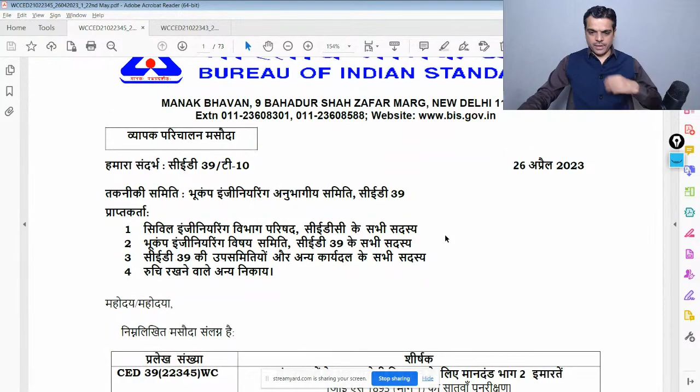Okay, so just let me share the screen now. Okay, so I hope you are able to see the screen now. This is IS 1893 part 2.

Okay, so I'll again highlight this point as we discussed, that we must examine this draft, and we need to state any difficulties which we may encounter or experience in our business or profession if this is finally adopted as national standard. So we must send our comments related to practical difficulties to BIS so that they can make appropriate changes in the document.

Okay, this is the format which we discussed. So you can refer the first part. Foreword is almost similar, wherein it is said that the different standards are being formulated, and here in this portion it says what are the changes made. So firstly, in this document, provisions are now added for the masonry building as well as for the steel building.

And here it quickly summarizes the major changes which are proposed in this document. The response reduction factor has been modified, and now it is renamed in the entire document as elastic force reduction factors, as we discussed in the part 1 also.

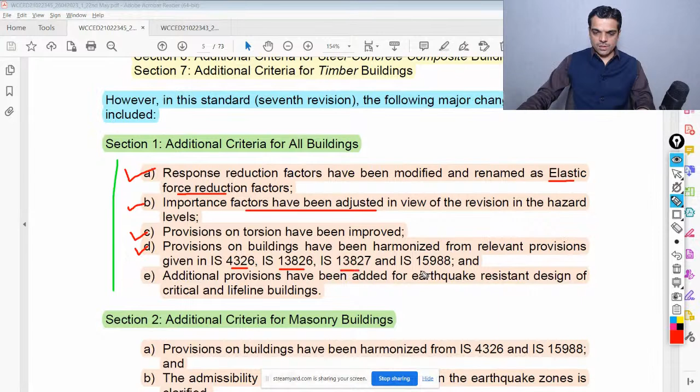Then provisions on the torsion have been improved. So we'll see what additional provisions are added now for the torsion. And then provisions on buildings have been harmonized from relevant provisions given in 4326, 13826, 13827, and 15988.

Section 2, additional criteria for masonry buildings, is now added in this document. So provisions on buildings have been harmonized from 4326 and IS 15988. The admissibility of different structural systems in the earthquake zone is clarified.

Now these are again two major revisions for concrete buildings. First of all, the admissibility, or let's say which structural system we can provide in a different earthquake zone, that is clarified, or we can say it is mentioned in the table.

And the structural plan density of the structural walls is now varied with the earthquake zone. So in the present standard, the structural plan density is constant, but now in the draft standard, it is proposed that it will vary with reference to the earthquake zone.

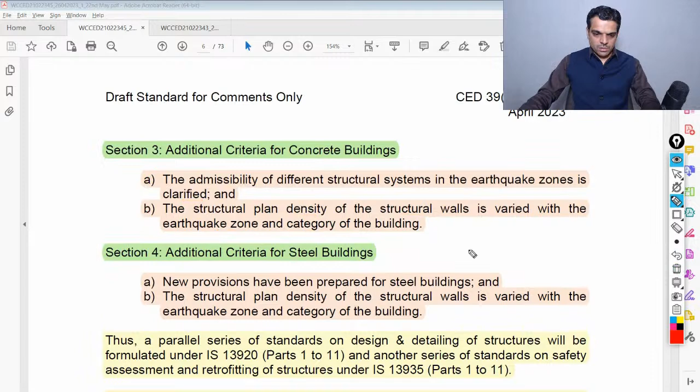And for steel structures also now criteria are added. So new provisions have been prepared for steel buildings. I think this point number B looks like a copy paste because structural plan density is not applicable for steel structures.

And these are the various standards which are referred while preparing this draft document. Okay, so the foreword is always a very important part wherein we get a quick view of the document without getting into the final clauses.

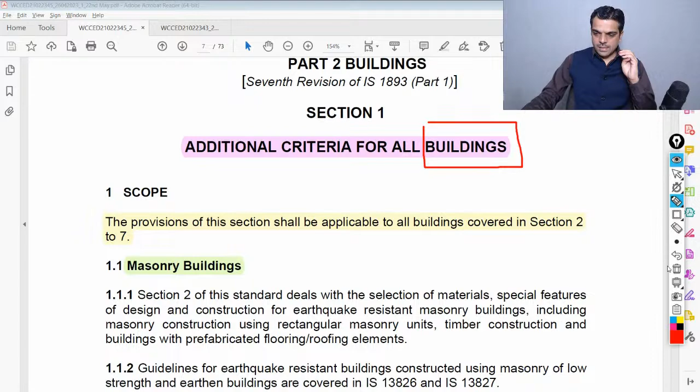So as we all know, part 2 is for building kind of structures, and this draft document is talking about masonry buildings, concrete buildings, and steel buildings. Terminologies are added now. So I have highlighted a few important terminologies which we'll see.

So for the base, now it is defined that for buildings with basement, it is considered at the bottommost basement level. And for buildings resting on pile foundation, it is considered to be at top of the pile cap. For the raft foundation, it is considered to be at top of the raft, and for footing, it is considered to be top of the footing.

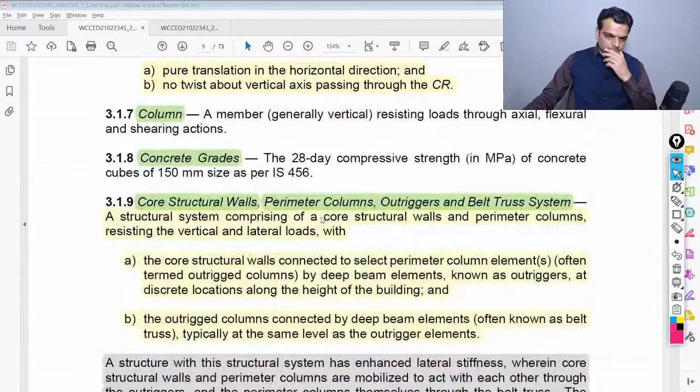There are definitions which were there in the earlier document also. The definition is added for core structural walls, perimeter columns, outriggers, and belt truss systems.

Okay, I think this is one of the provisions. So I have highlighted the important points based on my quick view of this document. Still, I'm referring this document. So if you find additional points, please populate them in the chat box. If time permits, we'll discuss it today, or we are planning a couple more sessions. In those sessions, we will again be discussing all the finer points which we might have missed out.

So for height of the building, this was a common question which we were receiving, what should be the height of the building wherein the basement is provided in the building. So what it says here, the height of the building from its base to the top of roof level, that's okay. Now in this para it says excluding the height of basement stories, if basement walls are connected with the ground floor slab, or basement walls are fitted between the building columns.

So what it says, if the basement walls are connected with the ground floor slab, that is the first condition, or basement walls are fitted between the building columns, in that case the height of the building needs to be considered excluding the height of basement stories. Okay. And in the second case, we need to consider the height of the basement stories when basement walls are not connected with the ground floor slab and basement walls are not fitted between the building columns.

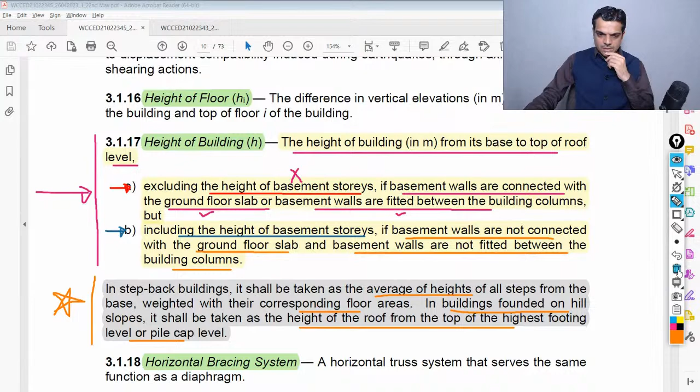So there were a number of questions which we received earlier for the step back kind of building. If this approach is used, we received feedback that the time period derived with this averaging of height is not appropriate. Of course, this is feedback which we received from a few practicing engineers, so I'm just highlighting it. Okay, these are different systems.

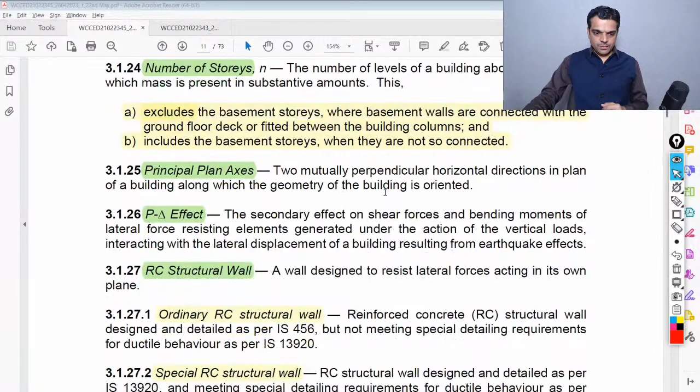Now in the number of stories also, the same thing is mentioned: it excludes the basement stories where basement walls are connected with the ground floor deck or fitted between the building columns, and it includes the basement stories when they are not so connected. The height of the building will have a major impact in calculation of the time period of the building, right? And that will impact the seismic demand of the building. That's why height of the building is a very important parameter.

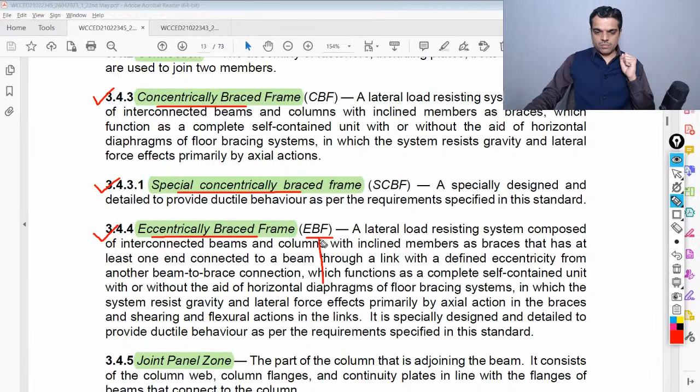Then terminologies are added for masonry buildings, because now there are new provisions for masonry buildings added in this document. Concrete buildings, steel buildings. For steel buildings, definitions are now added for CBF, SCBF, EBF. CBF is concentrically braced frame, SCBF special concentrically braced frame, and EBF eccentrically braced frame. We'll see this towards the last part of the document. Now, in the higher seismic zone, it is said that only EBF should be provided. We will discuss that point when we reach that part of the document.

Okay, so let's go down now. These all are symbols. It says that the four main desirable attributes of earthquake-resistant buildings are robust structural configuration, at least a minimum initial elastic lateral stiffness, at least a minimum overall lateral strength, and adequate ductility.

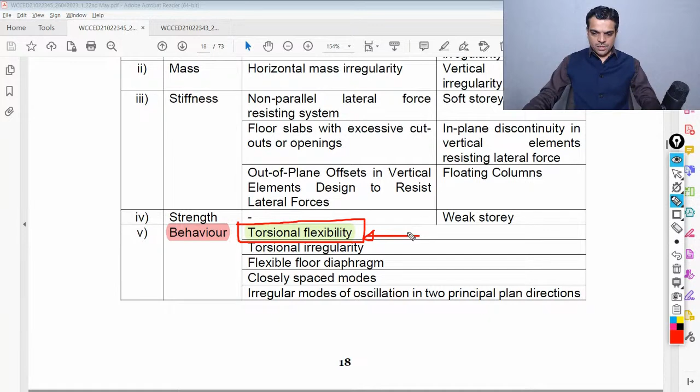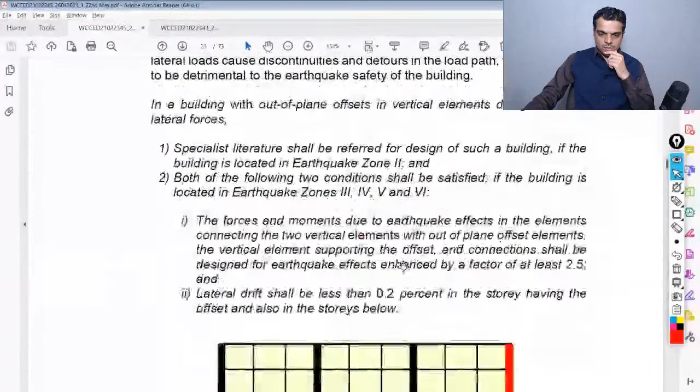Okay. Now, as far as irregularities are concerned, if you look at this table, I think this is one more change: torsional flexibility is one of the additions. Of course, torsional flexibility is defined from two criteria, which we'll see in the subsequent part of the document. As I could see, all other irregularities are the same as they were earlier. So re-entrant corners and plan irregularities, non-orthogonal panels. What I have observed is that the wording is almost the same. If you have noticed any differences in language for any type of irregularity, please mention it in the chat box.

Okay, so this is the torsional flexibility here. Now, a building is said to be torsionally flexible, or flexible from the torsional perspective, and this statement is already there in the present code, when the natural period corresponding to the fundamental torsional mode of oscillation is more than those of the first two translational modes of oscillation along each principal plan direction. So this statement is already there, right? And it is said that buildings with torsional flexibility shall not be permitted. Okay. So it is not permitted, right?

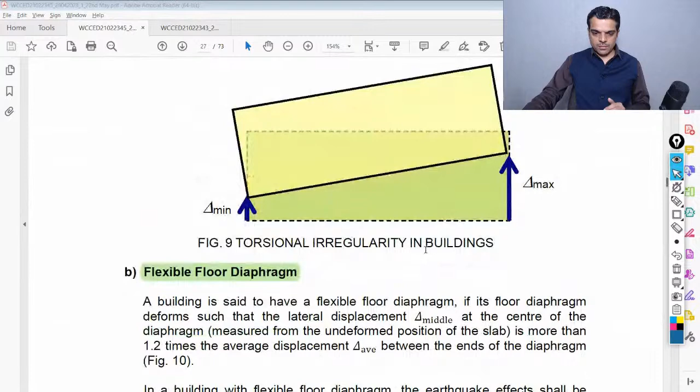And then it gives the definition of torsional irregularity. But torsional flexibility is again defined in the subsequent pages of the document. This is a flexible floor diaphragm, then irregular modes of oscillations.

So in the stiffness requirement, the stiffness modifiers are defined for three different types of structures: masonry building, concrete building, and steel building. For steel buildings, as we know there is no possibility of any crack formation, and that's why all factors are one. So no property modifier or stiffness modifier is required for steel buildings.

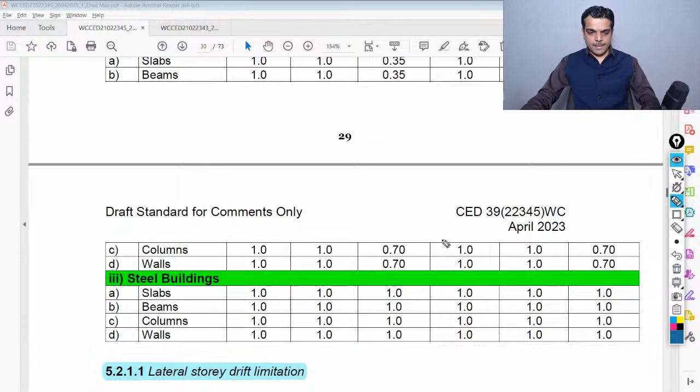For masonry buildings, let's skip discussion at this point and focus only on concrete buildings. In the concrete buildings, if we observe the value, then the value of stiffness modifier is same for the serviceability condition as well as for the ultimate condition. This is not correct in my opinion. The value shall be different. Even if you refer IS 16700, these values are different for serviceability as well as for the ultimate condition. So this is one change which needs to be made in this document.

The lateral story drift in the buildings is now defined with reference to the zone of the building. In the present standard, it has a fixed value. But now the value varies with reference to the zone. So we can see as zone increases, the permissible lateral story drift decreases. For example, for zone number 6, the value is restricted to 0.0020, which may be quite stringent. We have not put any numbers, but I think this drift could be stringent because on one side, earthquake forces have also increased, as we were discussing in the earlier session. Similarly, on the other side, the permissible drift value is also restricted in the higher seismic zone. And for zone 2, the permissible drift is 0.0040.

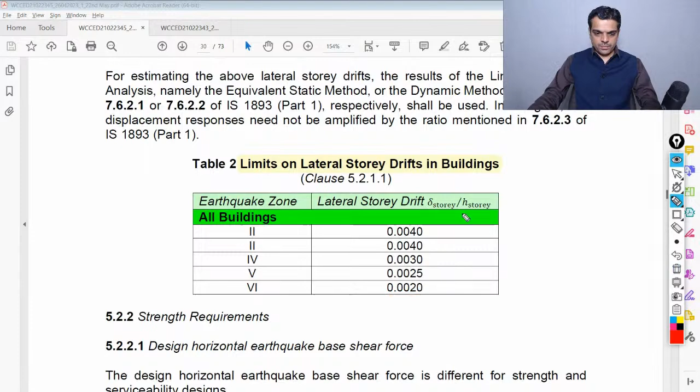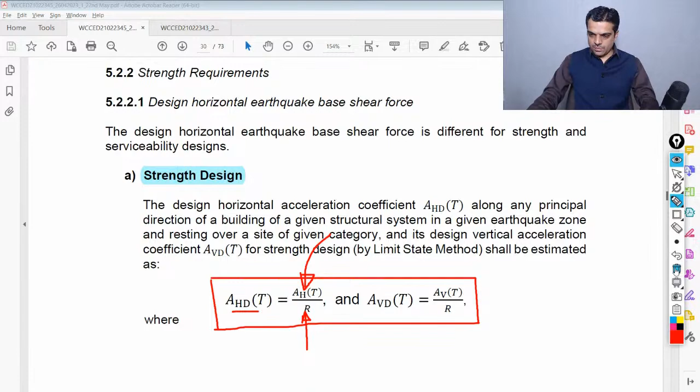So, for strength design, the horizontal seismic force will be derived using this formula. We will derive the value of A_H from part 1 of this IS 1893 document, and the R value will be defined from this draft standard. Once A_H is divided by R, we will get the seismic demand, or let's say a design base shear, or a seismic coefficient, we can say.

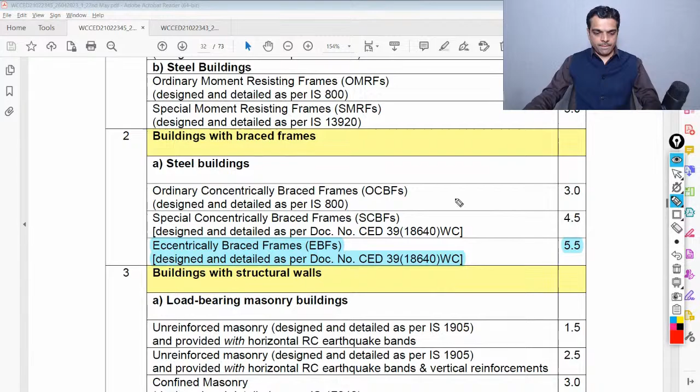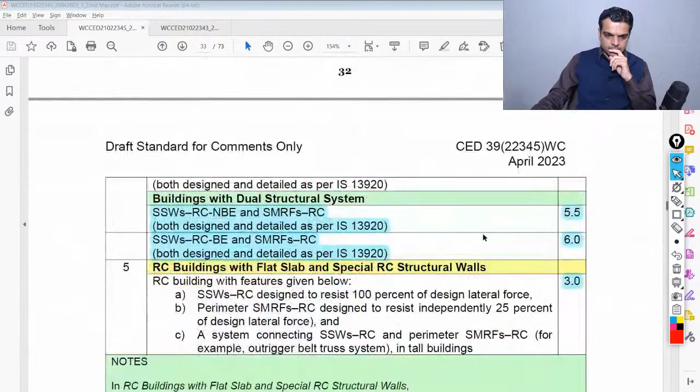And then for buildings with dual structural system: SSWs means special RC structural wall, NBE means boundary elements are not provided, and SMRF. So if it's a combination of special moment resisting frame and specially designed structural wall which doesn't have boundary elements, in that case the factor is 5.5. And if everything is same and you provide the boundary element, in that case the factor will become 6.0. And for the flat slab structures, the factor is mentioned as 3.0.

So these are a few changes which I could notice in the new terminology, which is elastic force reduction factor.

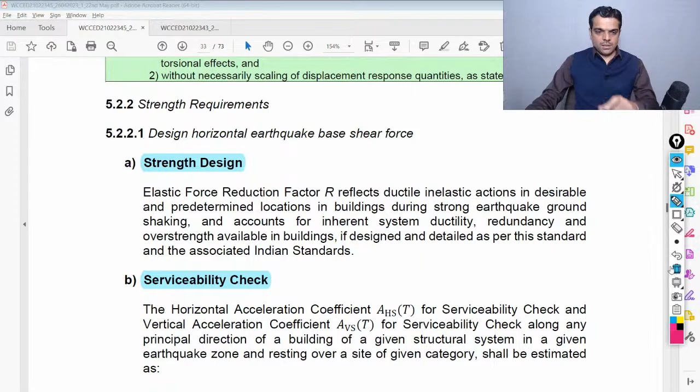So as we were discussing in part one, the seismic demand will be different for strength design and serviceability check based on the time period. So we need to calculate the earthquake forces separately for both the cases.

Seismic weight of floors is defined, like how much reduction we can do in the live load. Okay, let's skip this part.

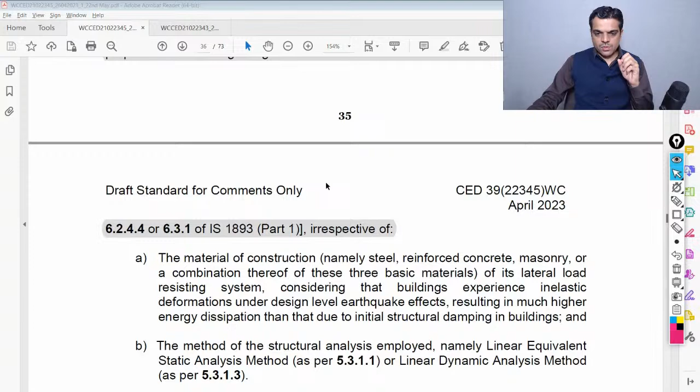Importance factor, as we discussed, these importance factors are actually calibrated to match the value of seismic demand. Of course, the seismic demand from these draft standards is significantly higher compared to the present standard. But if we compare the importance factor value, we could see that the importance factors are not increased. It's only the zone factors which are increased significantly.

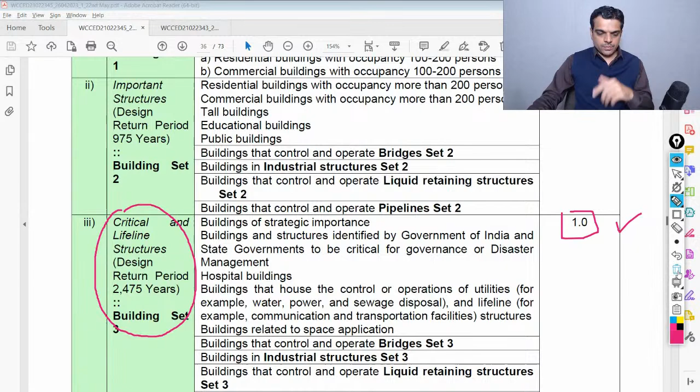For example, let's see the critical lifeline structures - for that also importance factor is 1 only. Whether it's an important structure or a normal structure, the importance factor is only 1. So that means the effect of importance factor is already included in the earthquake zone factors introduced in part 1 of the document. Yeah, and even for special structures, we can see the factor is only 1.

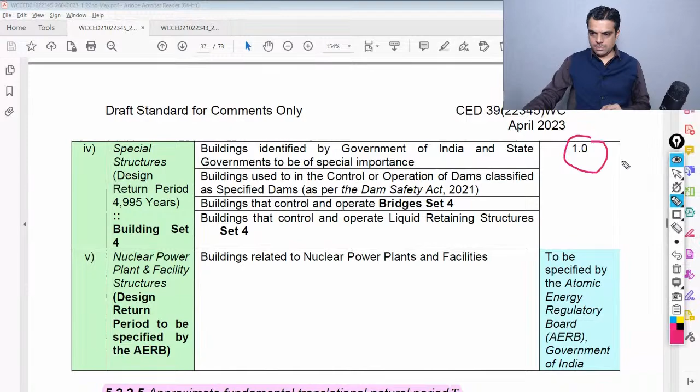Then approximate fundamental translational natural period - as we were discussing, the height of the building H. It is already mentioned here that the height of the building excludes the basement stories where basement story walls are connected with the ground floor deck or fitted between the building columns, but includes the basement story when they are not so connected. So accordingly, height will be determined and will have impact on the time period calculation.

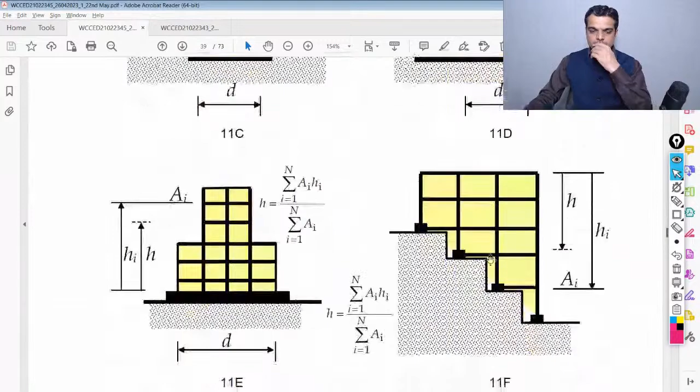All other buildings, okay. The minimum design horizontal base shear force is now defined from this formula, which is 0.625 into Z, which we'll get from part 1 as we were discussing in the last session. So Z will be replaced here in this equation. Importance factor we'll get from this document, and R also will get from this document. So from that we can determine the minimum earthquake force, and in no case the earthquake force shall be less than 0.015 W.

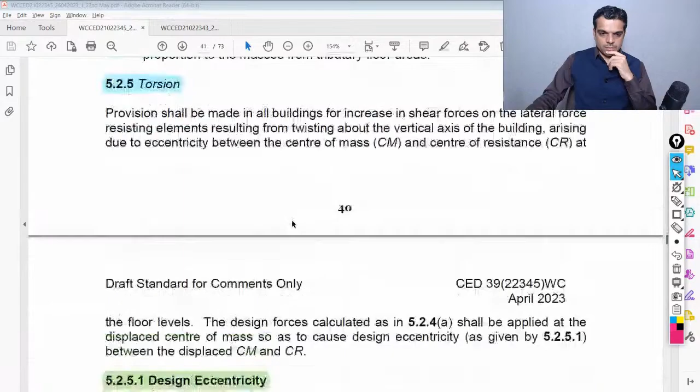Then distribution of design horizontal base shear force. And for the torsion, the design eccentricity formula is now defined for 3 different types of analysis - or we can say the equation is changed. If we are performing only linear equivalent static method... but for the majority of cases this linear equivalent static method is not applicable. Most probably we'll have to go for linear response spectrum method. So for the linear response spectrum method, the torsional or design eccentricity should be considered with this formula, which is 0.05 times Bi, where Bi is the floor plan dimension of the floor i perpendicular to the direction of force.

And this is one new concept called torsional flexibility of building. So torsional flexibility is already included in the upper part of the document, which we were discussing while looking at the section on torsional irregularity, right? So again, torsional flexibility of building is mentioned here, and one equation is given, psi equal to this equation, okay? And this could lead to additional practical difficulty to derive this torsional flexibility, because it requires certain parameters - like small r, the translational radius of gyration of the mass of the building at the floor level, and rk theta, the torsional radius of gyration of the mass of the building at the floor level. And this tau is the ratio of natural periods of the fundamental torsional and fundamental translational modes of oscillation.

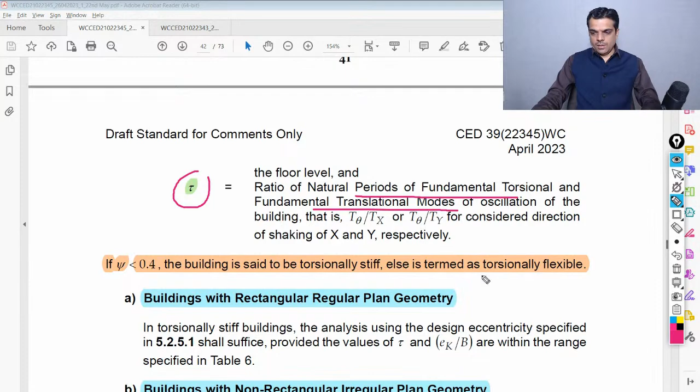So after replacing all the values, if psi is less than 0.4, the building is said to be torsionally stiff. Else, it will be termed torsionally flexible. So now there are two definitions for torsional flexibility - one definition was already included in this document in the upper part, and now again a definition is given for torsional flexibility, right?

And there are two cases: buildings with rectangular regular plan geometry - mostly we'll fall in this category - and buildings with non-rectangular irregular plan geometry. So in torsionally flexible buildings, the buildings shall be reproportioned to ensure that psi is less than 0.4, right? So this could be additional practical difficulty for adjusting this factor. And first of all, how to calculate this factor - that also needs to be defined in detail, maybe with worked out examples.

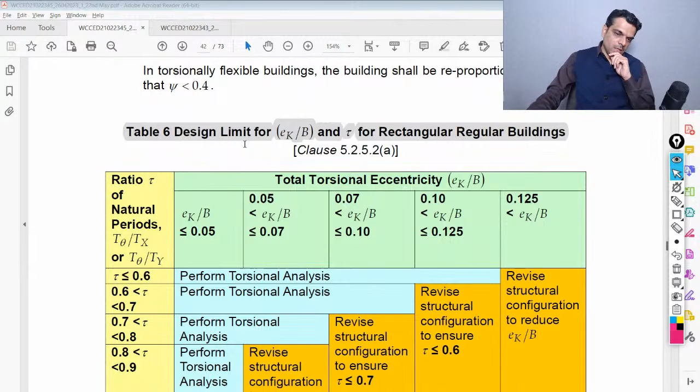And here it shows the design limit for ek divided by b and tau for rectangular regular buildings. So based on different limits, the prescription is given, like perform torsional analysis, or revise structural system, etc. So based on this table, we'll get the instruction on what could be the next step.

So this could lead to additional practical difficulty, because it's already said that the torsional mode shall not be the first mode. So this is already established in the earlier part of the document - that is one part which we have to fix. And after fixing this, this detailed calculation needs to be performed again to ensure that the building is torsionally stiff.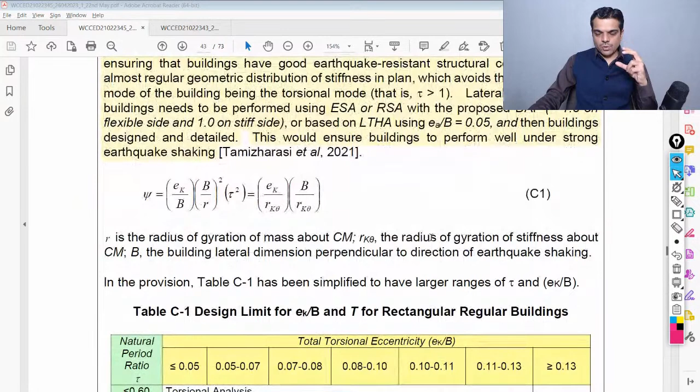Here, commentary is given on the basics and intention behind this clause. But I think this torsional flexibility could be clubbed in the one clause only, wherever the clause of time period is given. So requirement could be clubbed in just one paragraph.

Deformability requirement, which is separation between adjoining units, was there in the previous document also.

For the structural analysis, as we discussed, linear equivalent static method would not be applicable in majority of cases, because it's applicable only for regular structures with approximate natural period less than 0.4 second. For all other cases, we have to go for linear dynamic analysis method.

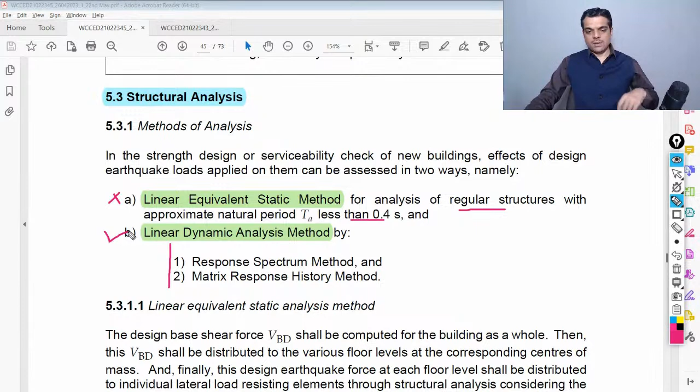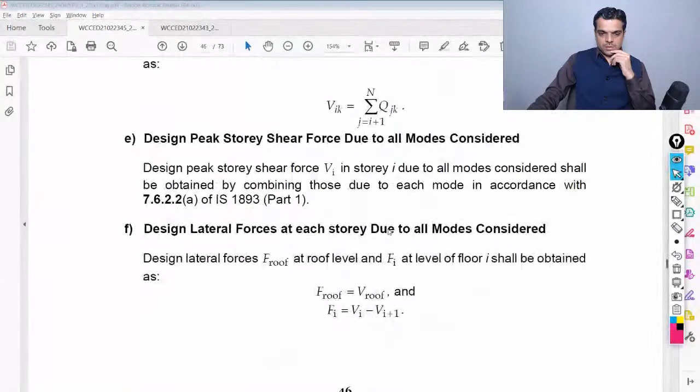And then it defines the steps for response spectrum method as well as for the equivalent static method.

This paragraph is talking about scaling of the earthquake force, which is there in the present code also.

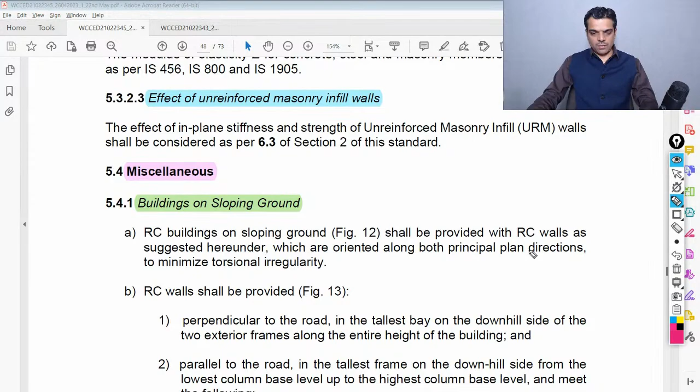And effect of masonry infills is to be considered as mentioned in the subsequent pages of the document. For buildings constructed on sloping ground, additional provisions are given or proposed in the draft standard.

So these are buildings which are constructed on the sloping or hilly region, or we can say on the sloping ground. This is a new provision added in this document, and it also suggests the RC wall configurations for buildings on hill slopes.

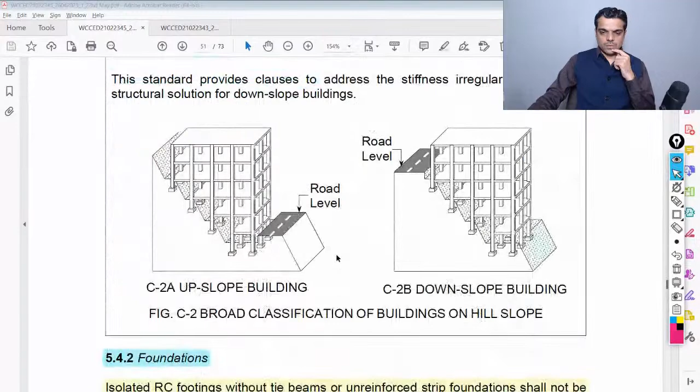Now for the foundation, it says that isolated RC footings without tie beams, or unreinforced strip foundations, shall not be adopted in buildings rested on soft soils, which is site category D, in any earthquake zone.

So what it says is that if site category is D as per IS 1893 part 1, in that case, tie beams need to be provided for isolated RC footing in any earthquake zone.

And then there is one more statement: use of foundations vulnerable to significant differential settlement due to ground shaking shall be avoided in buildings located in earthquake zones 3, 4, 5, and 6.

And individual spread footings or pile caps shall be interconnected with ties, except when individual spread footings are directly supported on rock, in buildings located in earthquake zone 5 and 6.

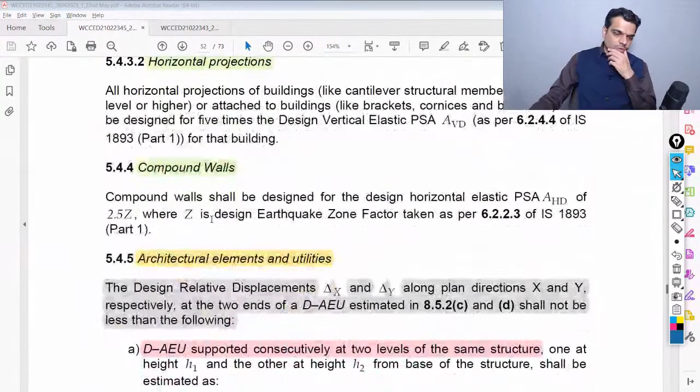So these clauses are identifying or mentioning tie beam requirement at foundation level for arresting differential settlement. Then cantilever projections, vertical projections, and horizontal projections are mentioned. Compound walls - that's already there in the current standard.

There's architectural elements and utilities, which is AEU - that's a new addition in this draft standard. So here it identifies the design requirement.

Like, AEU supported consecutively at two levels of the same structure, one at height H1 and other at height H2 from the base of the structure, shall be estimated as equivalent static linear analysis and with the linear dynamic analysis. So worked out examples may be there which clarify the concept mentioned in the document.

This next paragraph is also talking about AEU elements.

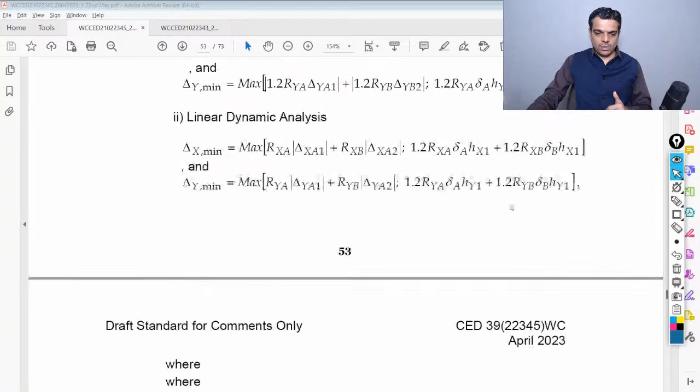Section 2 is for additional criteria for the masonry building. For this masonry building, I'm still going through this document. I have not studied it in detail, but if you have certain observations on this, please mention them. Just one thing I wanted to highlight.

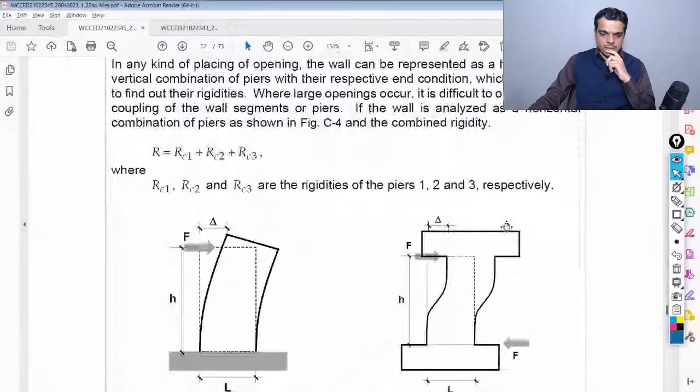So here it says that for brick masonry structures, structural analysis by hand calculation is feasible for single-storied simple configurations that are regular in plan and in elevation, with minimum torsional eccentricities.

So this paragraph is written for the masonry building. For more complex configurations of masonry buildings, alternative approaches shall be adopted, such as equivalent frame modeling or finite element modeling.

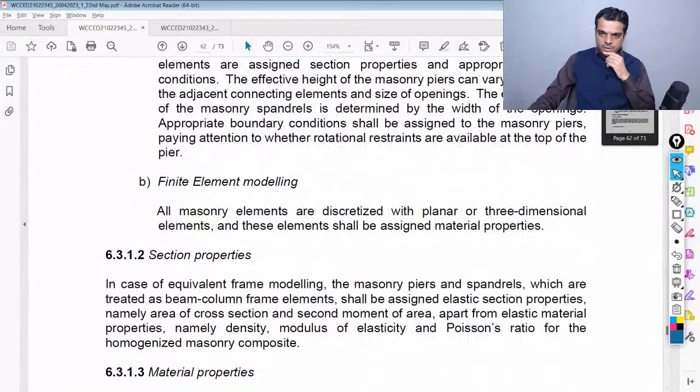Then it identifies how it may be done. Additional criteria for the concrete buildings.

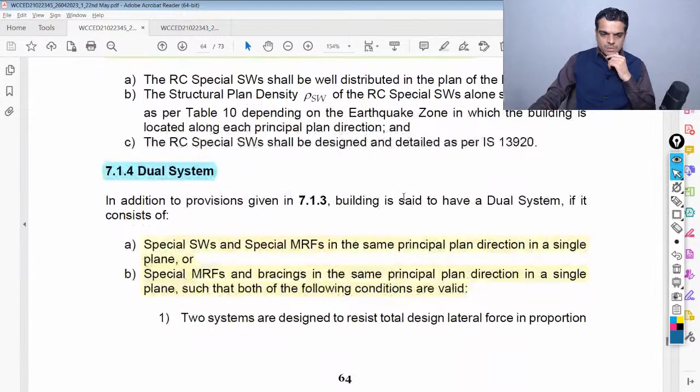And as we were discussing in the foreword part, the minimum structural plan density of structural walls is revised, or rather it is defined with reference to the earthquake zone, and that value varies from 1.0 to 2.5 percent. In the present standard, this value is 2 percent. So it is increased to 2.5 percent, and decreased to 1.0 here.

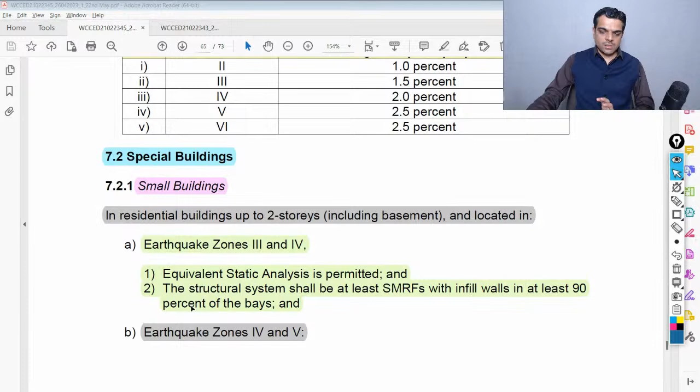And then special buildings. In residential buildings up to 2 stories, including basement, and located in earthquake zone 3 and 4, equivalent static analysis is permitted, and the structural system shall be at least SMRFs with infill walls in at least 90% of the bays. So this way clauses are mentioned, and if the building is in earthquake zone 4 and 5. So these clauses are for the small buildings.

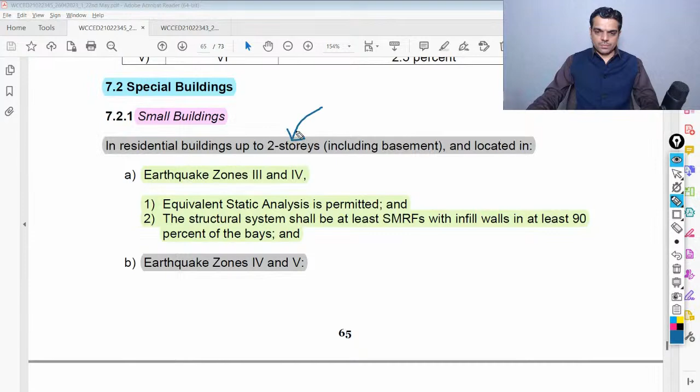So for earthquake zone 4 and 5, equivalent static analysis is permitted, and small buildings are defined as residential buildings up to 2 stories. And since the building is in earthquake zone 4 and 5, the structural system shall be at least SMRFs with infills with SSW with at least 1.5 percent structural plan density in each principal plan direction. Okay, this is for open stories.

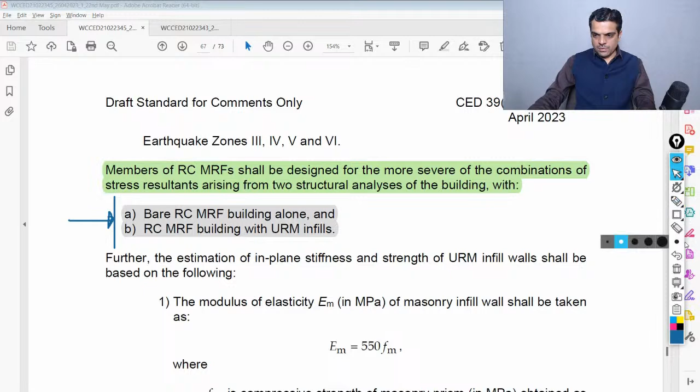Then braces, okay, unreinforced masonry infill walls. So wherever a masonry infill is provided in concrete buildings, as it is mentioned in this document, the effect needs to be considered. Let's say if we go to the upper part, in RC MRF buildings with unreinforced masonry infill walls, the effect of in-plane stiffness and strength of URM infill walls shall be considered on story stiffness and story strength of the building.

And when variations of story stiffness and strength along its height render the building irregular as per 5.1, as mentioned in the paragraph for the soft story, the irregularity shall be corrected, especially in earthquake zones 3, 4, 5, and 6. And the members of RC MRFs shall be designed for the more severe of the combinations of stress resultants arising from two structural analysis models, bare RC MRF building alone and RC MRF building with URM infills.

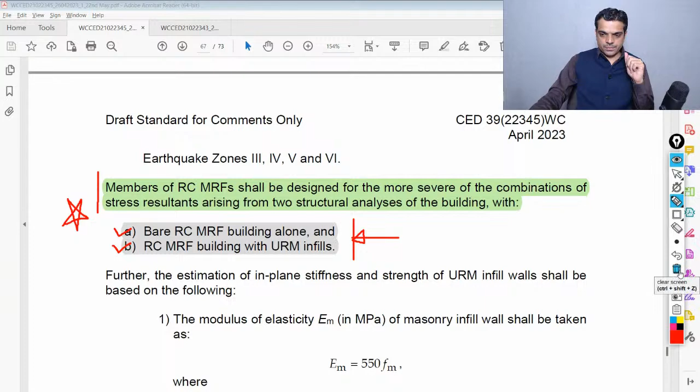So even in the present code, these kinds of statements are included. Of course, in the amendment this requirement was added, as I remember, and we experimented with this clause on a few buildings, and we found that there are a number of practical difficulties when we include the masonry infill as mentioned in this document. Of course, that's because of certain limitations of the software.

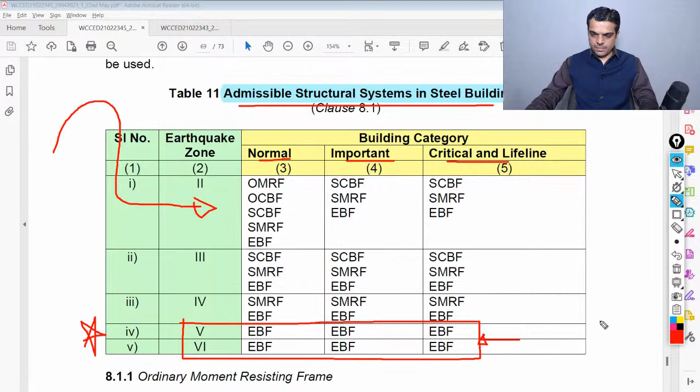And even if we refer here, in zone 4, SCBF is not permitted. So that also needs to be critically reviewed according to me. SCBF, which is special concentrically braced frame, is used extensively in very heavy industrial structures. SCBF has been used in heavy seismic zones, and the special concentrically braced frame is the most rigid structure available out of these three frames, right?

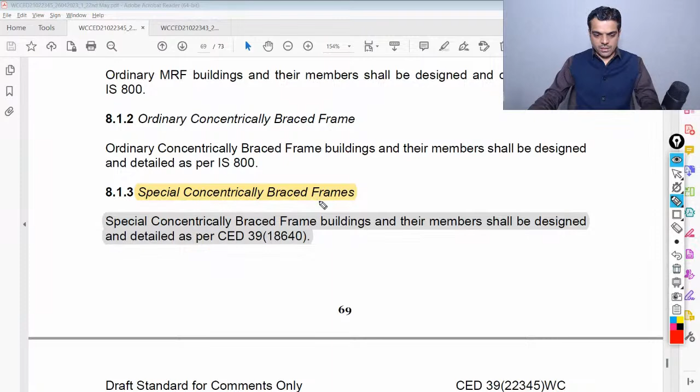Okay, so here it identifies special concentrically braced frames. So I think we can expect a few more draft documents which will be coming up, which will define the requirements for special concentrically braced frames. Right now, it is defined in Section 12 of IS 800 2007.

For steel structures also, the small building clause is written, wherein small building is added, in residential buildings up to 2 stories and located in seismic zone 3 and 4. Okay, I think the same paragraphs are reproduced, but here in the first part, in zone 3 and 4, it says SMRFs with infill walls in at least 90% of the base, and in zone 5 and 6, the structural system shall be at least SMRF with SCBFs and EBFs in each principal plan direction.

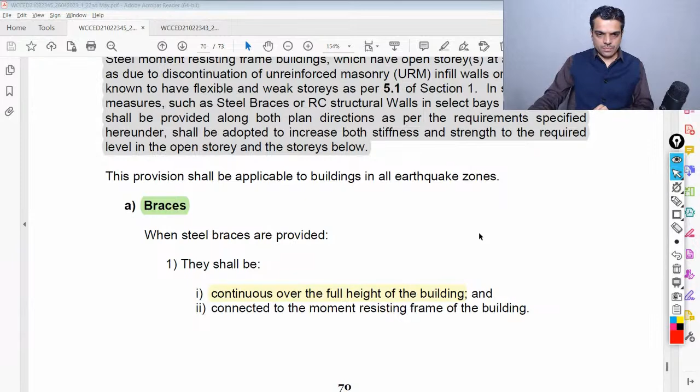Okay, so it was a quick discussion about IS 1893 Part 2, and I just tried to highlight a few of the points which I have noticed while going through this document. Still, I'm going through this document, and please share your observations also. So right now, I have just opened discussion points which we have received through the registration form, and it's running 500 plus points, but I'll just touch upon a few points.

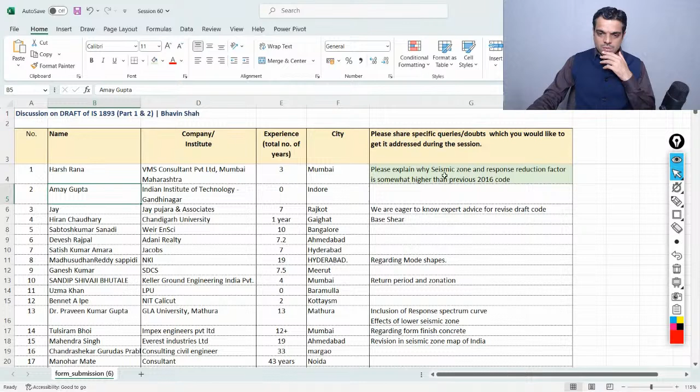Okay, please explain why seismic zone and response reduction factor is somewhat higher than the previous 2016 code. Of course, it requires detailed discussion on this, and there are a number of queries we have received on this part, that why these seismic zones have increased. Okay, so whatever questions we have, we must write to the BIS technical committee.

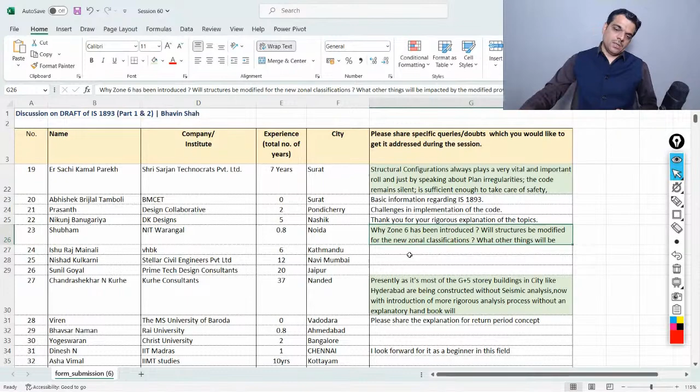Sachi Parekh is telling that structural configurations always play a very vital and important role, and just by speaking about plan irregularities, the code remains silent or is sufficient enough to take care of safety. Okay. Shubham is asking why zone 6 has been introduced. Will structures be modified for the new zonal classifications? So what will happen to the buildings which are already constructed?

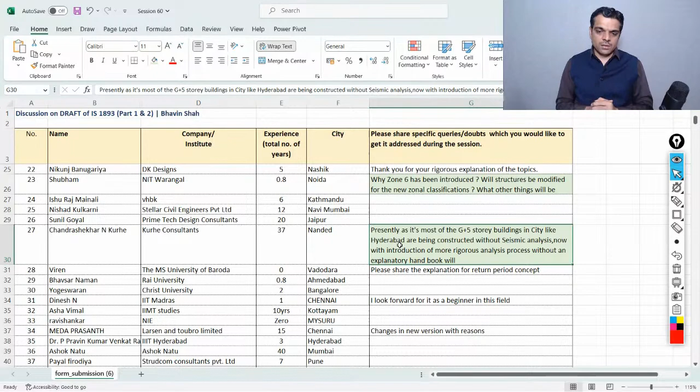Okay. And Chandrashekhar is telling that presently, most of these G plus 5 story buildings in a city like Hyderabad are being constructed without seismic analysis. Now, with introduction of a more rigorous analysis process without an explanatory handbook, absolutely right. If an explanatory handbook is not available, with this kind of complicated document, the design calculations could go on either side. There are all possibilities that the calculations could go on the unconservative side also, because of so many complications being added in the document, and in the absence of an explanatory handbook, definitely it would be very, very critical.

So, okay, Varsha Kanetkar is telling that the small buildings criterion seems dependent on number of stories only. Is it dependent on the floor area coverage, floor height and beam spans? Auditoriums and large community centers like structures, can they be called small buildings? Okay, so the first query, the small building clause which is added in the draft document is only for residential buildings. So it is not applicable to auditoriums and large community halls. Your point is absolutely right. That clause cannot be applied to auditoriums or large community halls, which could be of 2 stories, and they cannot be considered in any case as small buildings.

And then the second question, the zone map of Maharashtra has an additional zone added. So why is an additional zone added? Okay. Then Rahul is asking the applicability of soil stiffness calculations, modulus of subgrade reactions, on bridges designed by other codes, right? So right now I'm just touching upon a few points. Of course, we will try to discuss all the points in more detail in the next couple of sessions. But right now I'm just highlighting these points so that others can also think in this direction while formulating the comments.

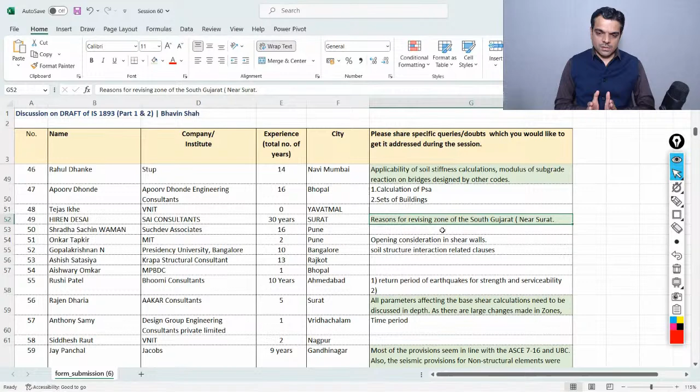Okay, Hiren Bhai from Surat is asking the reasons for revising the zone of South Gujarat near Surat. So now Surat is placed in zone 4, right? So that's a question, why Surat is moved from zone 3 to zone 4. Okay, Rajen is telling that all parameters affecting the base shear calculations need to be discussed in depth, as there are large changes made in the zone factor, importance factor, time period. Yes, absolutely right.

Jay is telling that most of the provisions seem in line with the ASCE 7-16 and UBC, and also the seismic provisions for non-structural elements were much awaited. However, the PGA derivation seems to be on the higher side. Also, the categorization of seismic forces to be considered for SLS, ULS, and serviceability is of main interest. And it would be great if we can compare with the other international codes, right?

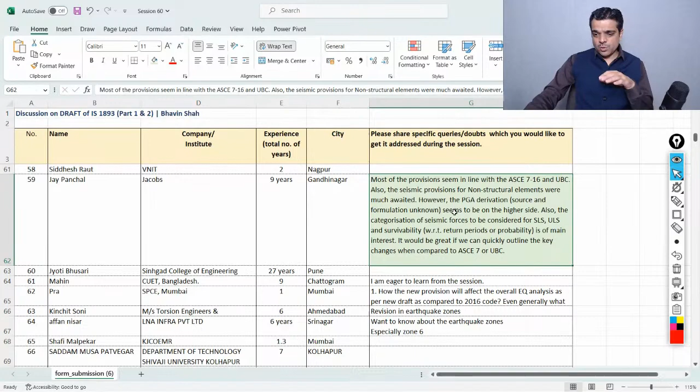But if you've experienced certain anomaly, or if you could experience certain practical difficulties which may occur in the future, then please write to the BIS technical committee. Okay, Dr. D. Hanumantha is telling that design EQ zone factor is substantially increased, so justification for increasing to be discussed. And that's this point. Obviously, we all must write to BIS technical committee that why substantial increase is made in the seismic or earthquake zone factor. So there are a number of points which are highlighted in that direction.

Okay, Shailesh Gupta is telling, in 1893 draft for calculating time period for high-rise building, shall 16700 draft formula be used, as the draft formula of 16700 gives higher time period as compared to 1893 2016 formula, and now in the draft Z value is increased. Yeah, so that's right. Now there are so many revisions happening, like for 16700 also draft was there. Recently we had draft of IS 1893 part 4 also, and now the draft of 1893 part 1, part 2. So your point is right. There are so many changes being made.

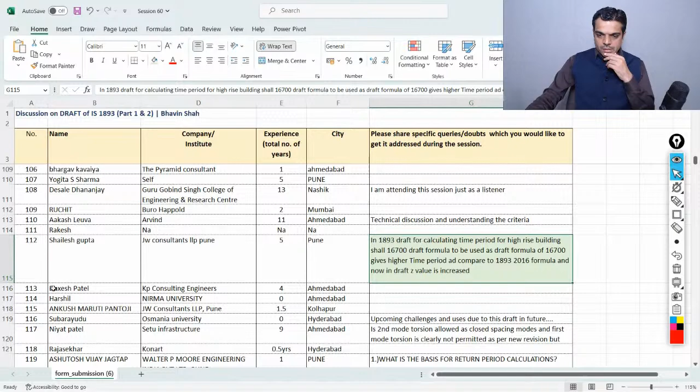Okay, Arpat is asking how to make a steel structure ductile, as far as RCC is made ductile by some clauses of IS 13920. For steel structures, we don't have special codes. Those codes are in formulation, as it is mentioned in the foreword of the document, and we will again receive draft codes of such documents. Okay, Debashish Bandyopadhyay is asking, is it possible to include the following points for design consideration of earthquake resistant structures: duration of earthquake and frequency content of earthquake. Right now these details are not added in our draft standards.

Gaurav is telling the revised draft for 1893 part 1 and part 2 has updated the calculation of base shear, but for the other factors, they have not made any significant change. All the values in the code appear to be arbitrary, and the base shear has been increased by 2 times. Please let me know if there are any corrections in this statement. So your observation is right. The force is increasing by 2 times, but the increase varies based on the seismic zone. The relative increase in the base shear is higher as seismic zone increases.

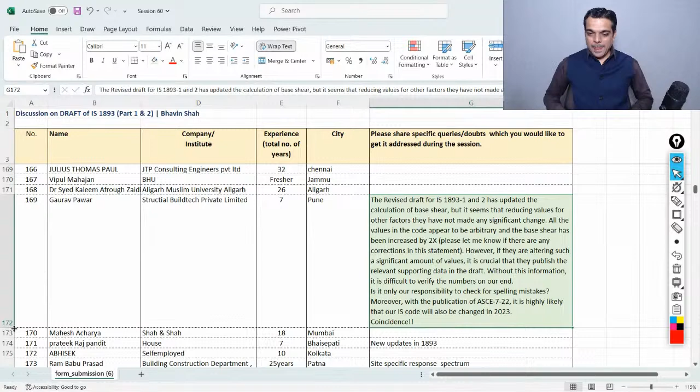And in the next line, he says that if they are altering such a significant amount of values, it is crucial that they publish the relevant supporting data in the drafts. Without this information, it is difficult to verify the numbers on our end. Is it only our responsibility to check for spelling mistakes? Moreover, with the publication of ASCE 7-22, it is likely that our IS codes will also be changed in 2023 as a coincidence. So he's making interesting points: the rationale behind all the changes must be available along with the draft documents, and if ASCE is recently revised, whether it will have impact on our current standard.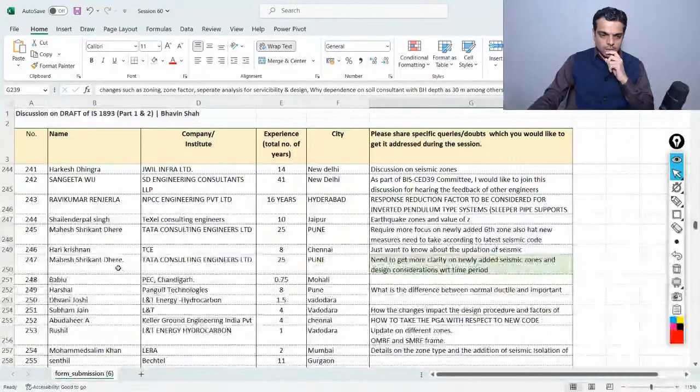Okay, Sauraj is telling, I'm quite surprised by the sudden increase in the values of the seismic force. Amarjit Singh is telling, changes such as zoning, zone factor, separate analysis for serviceability and design, and why dependence on soil consultants with borehole depth as 30 meter, among others. Mahesh Dhere is telling, need to get more clarity on newly added seismic zones and design considerations with respect to time period. Suresh Kumar is telling, necessity of higher grades of steel and its advantages and disadvantages with reference to earthquake resistant design.

Dr. Rana Pathak is asking, on what basis the zones of some cities like Indore have been reduced from zone 3 to zone 2? Is it safe for the developing cities where unplanned and non-engineered construction is taking place at a very fast pace?

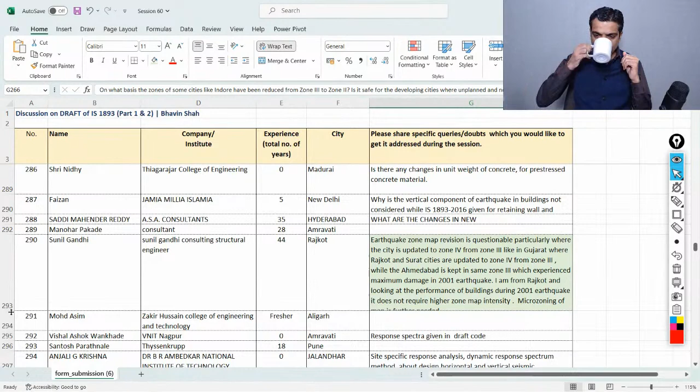Okay, Sunil Gandhi from Rajkot. He said that earthquake zone map revision is questionable, particularly where the city is updated to zone 4 from zone 3, like in Gujarat, where Rajkot and Surat cities are updated to zone 4 from zone 3, while Ahmedabad is kept in the same zone 3, which experienced maximum damage in the 2001 earthquake.

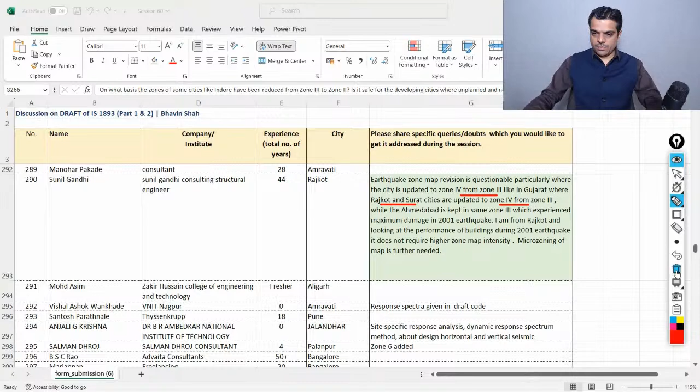So he's from Rajkot, and looking at the performance of buildings during the 2001 earthquake, it does not require a higher zone map intensity. And micro zoning of the map is further needed. Okay. So there are maximum questions on the earthquake zone and the increase in the seismic shear or design base shear.

Okay, Nikhil is asking for clarity on the load combinations, and why and how the strength and serviceability modifiers have been kept identical, right? We discussed this point. They shall not be identical, they shall be different. And he's talking about one more point. We need to check this clause. So he says how realistic this formula would be for buildings even up to 50-meter height. Is there any international or national literature that would second use of this formula for, say, 15-storied buildings?

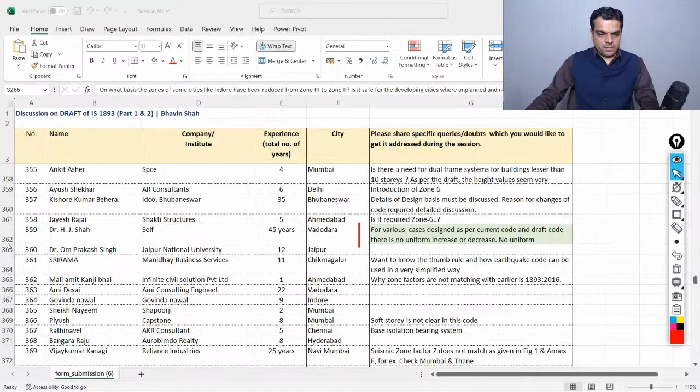Dr. H. J. Shah says that for various cases designed as per the current code and draft code, there is no uniform increase or decrease. No, let me just stretch it. Okay, no uniform comparison can be made. Right, as we just discussed, the variation is not constant. It varies with reference to the category of the building. It varies with reference to the seismic zones.

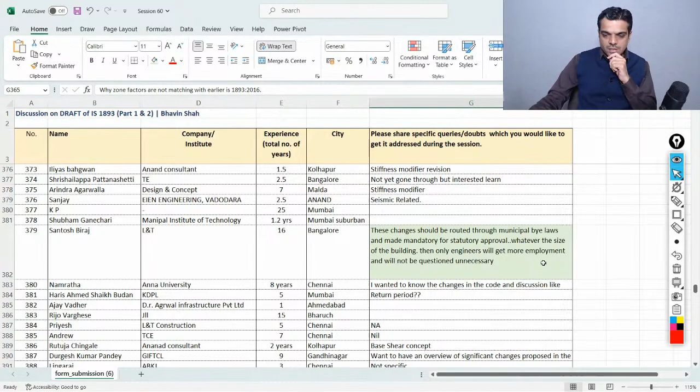Okay, Santosh Biraj is saying that these changes should be routed through municipal bylaws and made mandatory for statutory approval, whatever the size of the building; then only engineers will get more employment and will not be questioned unnecessarily. Okay, Chinmay Sarkar is asking how easily we can adopt the new provisions of the code in our design. What effort should be given for this adoption? So that's what we are discussing, that it will require a significant amount of effort and practical difficulties would be involved if the documents are accepted as it is.

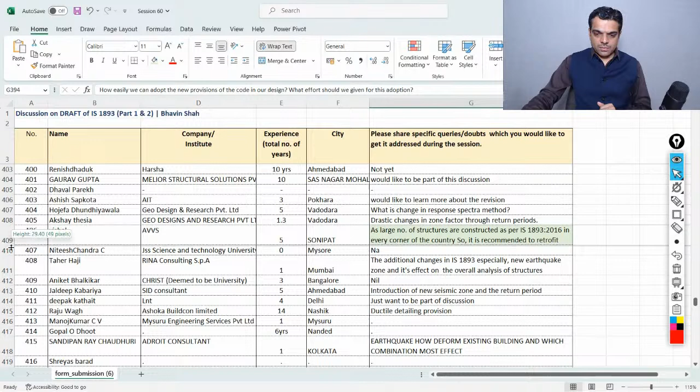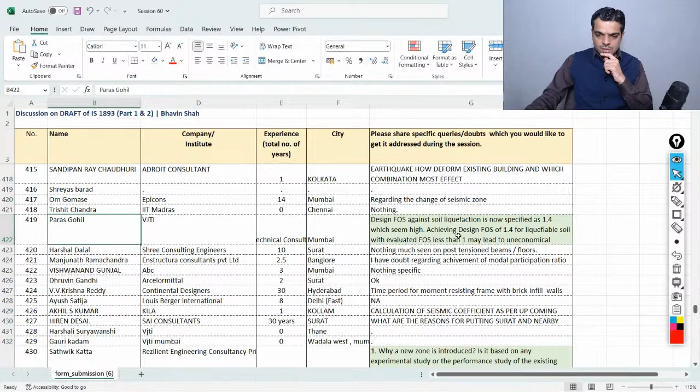Okay, Vishal is saying a large number of structures are already constructed with the previous version of the document in every corner of the country. So it is recommended to retrofit the structures for such new forces. Right. So his question is what will happen to the existing structures which are executed with reference to the earlier codes? Okay, Paras Gohil is making a note about the design factor of safety against soil liquefaction, which is specified as 1.4, and according to him it appears conservative.

Okay, Sathwik is asking why a new zone is introduced, and is it based on any experimental study or the performance study of the existing buildings in that zone? Would like to know more about it. So you can refer to IS 1893 Part 1, in the appendix as well as in the foreword, where a brief description is given of what methodology was adopted, but the sudden increase with such a magnitude is not at all justified.

And second, what is the rationale behind having different Z values based on the return period, when we already have the importance factor I to take care of it? So now if we see, actually the importance factor is becoming 1 for the majority of the buildings, as we were looking at in part 2. So you're right, more or less I will now become obsolete. It doesn't have any impact in the calculation because it has a value of 1.

Kevupulla Raju is asking to elaborate the combined effect of different sets of stiffness modification factors with various building plan aspect ratios on time period for mid-rise, high-rise and tall buildings, and seismic responses for bare frame RCC structures. Okay. Ram Prasad is saying, as per the draft document, it will be very difficult to implement the codal provisions. Some of the clauses are not clear. That should be explained clearly, right? Okay, Padam Kumar is saying that there are a lot of changes. Yes, indeed, there are significant changes made in this draft standard.

Okay, Manohar Mate is saying that the IS 1893 Part 4 draft revision was circulated early this year. Last year end, IS 16700 for tall buildings was issued. The proposed draft has many new provisions, including a change of approach in assessment of earthquake actions from the earlier deterministic to a probabilistic one. The new approach gives considerably high storey and base shear for most of the locations in Zone 3 and above. This is more predominant at places in the newly formulated Zone 6.

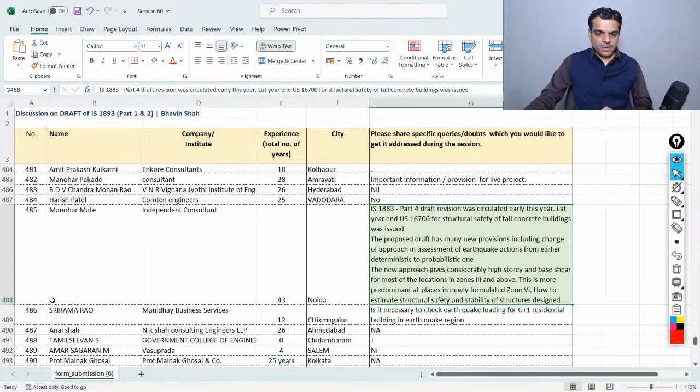How to estimate the structural safety and stability of structures designed based on recently published IS codes as listed above, and also designed as per the present 2016 version of IS 1893 Part 1, in case it requires any retrofitting, and how to handle such situations. The new draft emphasizes that this shall be followed as far as possible in case of ongoing works.

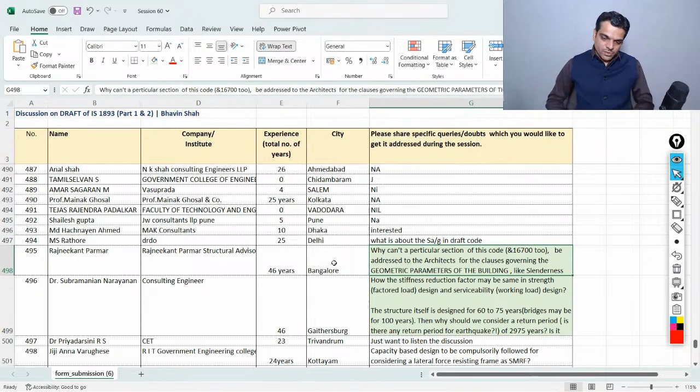Okay, Rajneekant Parmar has mentioned an interesting point: why can't a particular section of this code, and 16700 too, be addressed to the architects, for the clauses governing the geometric parameters of the buildings like slenderness ratio, irregular plan shapes, vertical irregularities, soft stories, etc.?

Okay, yes, Dr. Subramanian Narayanan sir is telling how the stiffness reduction factor may be the same in the strength design and serviceability design. The structure itself is designed for 60 to 75 years, bridges maybe for 100 years. Then why should we consider a return period of 2975 years? Is it not ridiculous, right? So we are designing our structures, generally buildings, for 60 to 75 years. Then why is a return period of 2975 years considered? That's absolutely right.

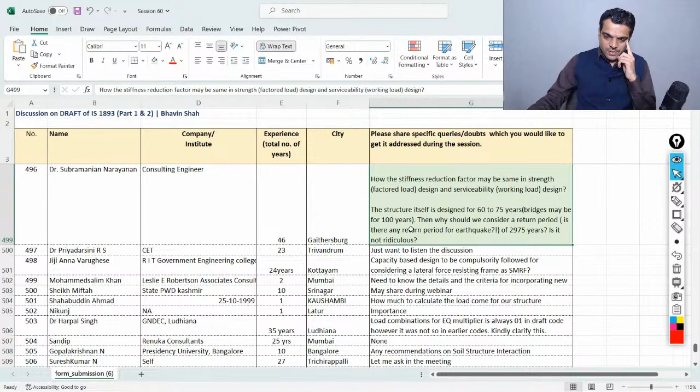And it's actually because of this return period that the intensity of the earthquake force is increasing significantly. So as we reduce this return period, the earthquake force intensity which we need to consider for the building design will definitely come down.

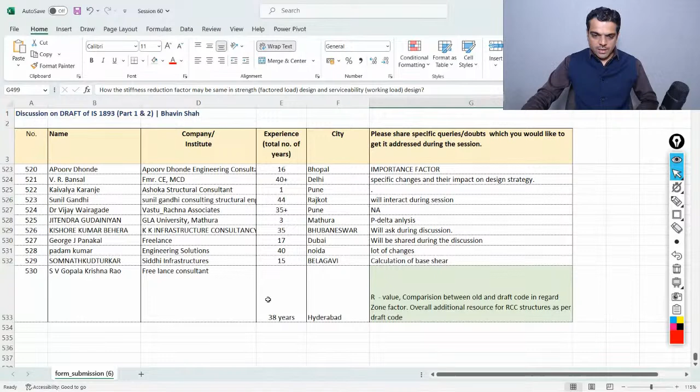S V Gopala Krishna Rao is asking about the R value comparison between the old and draft code regarding the zone factor, and overall additional resources for RCC structures as per the draft code. Okay, so I've just touched upon a few points. Still, we are going through this document. We can see here 530 plus points which we have received. Okay.

Okay, so Dr. Subramanian Narayanan sir is telling that this code makes all old structures and also the structures under construction unsafe. So you're right. If this document is published as it is, then all old structures or the structures which are in construction will become unsafe overnight on paper.

Engineer Naresh says the code writers are interested in including only complex things in the code. Then how will they introduce the rectangular stress block? So this is the important point. While writing the code, they should focus on simplicity, and if it is as simple as possible, then the chances of errors will be minimized.